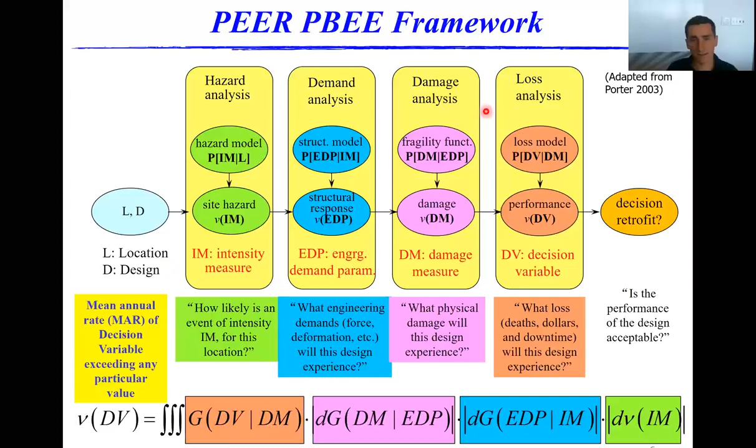So the framework essentially works by one-step memory, where, for example, the seismic hazard here depends on the location and the design. The structural response hazard depends solely on the intensity measure from the previous step, etc., through damage analysis and through loss analysis. So the focus of my presentation is going to be particularly on the seismic hazard analysis and the demand hazard analysis.

So here is a simple three-dimensional structural model that I've used as a benchmark for the purpose of illustrating how uncertainty quantification can be applied to time history analyses. So it's a 2x1 bay steel frame, which was designed using the design code for Seattle.

All members are wide flange shapes. The beams are made of A36 steel and the columns are made of A992 steel. The fundamental vibration period is 1.52 seconds, and we will be subjecting this model to bidirectional ground motion records.

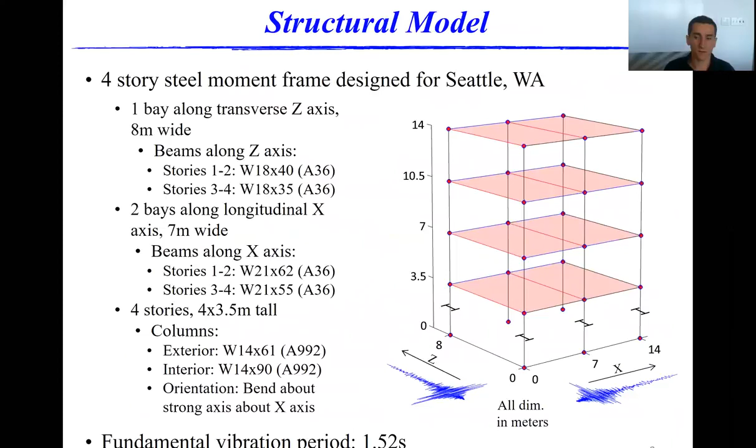So all members in my structure are modeled using one element. It's a nonlinear fiber discretized force-based beam column element. It uses 7 Gauss-Lobatto integration points, and they also employ the P-delta nonlinear geometric transformation and a linear elastic section aggregator for shear and torsional behavior.

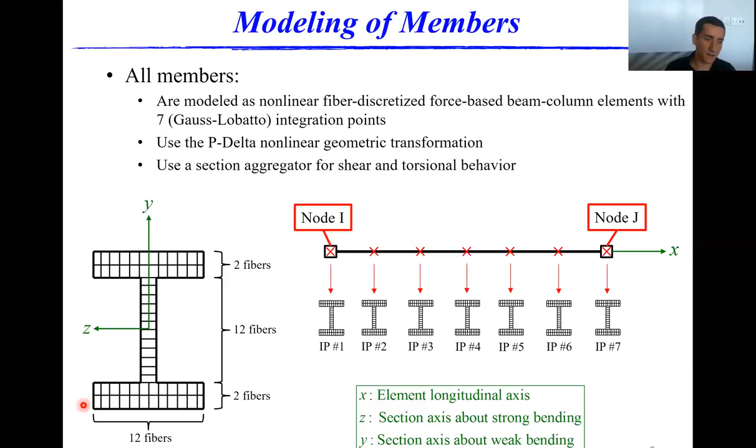And you can also see the fiber discretization right here. So we have 24 fibers in the bottom and top flanges and 12 fibers within the web. The fibers employ the Menegotto-Pinto uniaxial stress-strain relationship, which accounts for strain hardening once the steel is yielded.

The material parameters illustrated here, for example, Young's modulus, the yield strength, and the hardening ratio are going to be modeled as random variables. We're going to do this both for A36 and for A992. And so let's look at how they can be modeled with uncertainty.

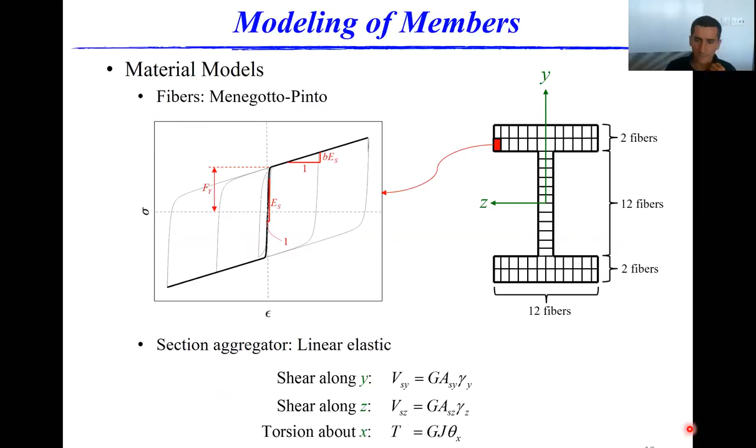Parameters subject to uncertainty are modeled as random variables. A random variable is a variable that can take any number of possible values. A realization of a random variable is a specific value that that random variable takes. So for example, if we're considering the elastic modulus of steel to be a random variable, then a realization might be 29,200 ksi. And since some realizations are more likely than others, a likelihood distribution must be identified.

Two of the most common ones are the uniform or equally probable distribution, or the normal bell-shaped distribution. These uniform and normal distributions are examples of probability density functions, or PDFs. PDFs are characterized by their distribution parameters, for example, the mean or the standard deviation here.

The area underneath the distribution within a set interval describes the probability of being within that interval. So for example, the probability of being within 1 standard deviation of the mean is about 68% for a normal distribution. And since the PDF must define all possible outcomes or realizations, the total area underneath it must be equal to 100%.

And finally, a common way to convey the dispersion of these distributions is to normalize the standard deviation by the mean. This is known as the coefficient of variation, and it provides a more intuitive measure of the uncertainty or variability as a percentage of the expected or mean value.

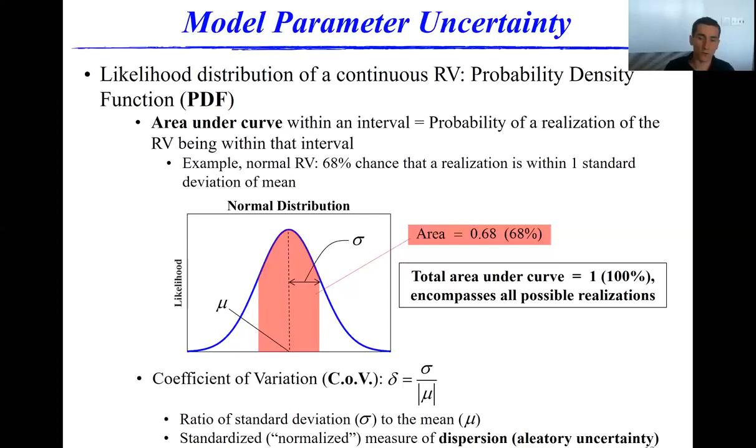So for my structure, to reiterate, I model Young's modulus, the yield strength, and the strain hardening ratio separately for A992 and A36 as normal and lognormal variables. You can see their means and the coefficients of variation. The yield strengths, I took the expected values, not the nominal values.

And we also chose to model the equivalent viscous damping ratio of the structure as a random variable. We employ Rayleigh damping, so it uses the 2 fundamental translational modes, and we have a mean value of about 2%, coefficient of variation around 20%.

I just want to key you guys in real quick: some of these variables have higher coefficients of variation than others. Young's modulus is around 3%, it's pretty low. Yield strength between 5 and 10%. So really the variables with high variation are the strain hardening ratios and the damping ratio.

And also we can define correlations if we have statistically dependent data. For steel, this is not a concern, but for concrete, you might have, for example, Young's modulus and compressive strength that are very positively correlated. So that has to be defined as well.

And now, even though we have clearly defined all the random variables, this alone is not sufficient for an OpenSees analysis. As we know, OpenSees requires specific numerical values in order to run. It doesn't have any understanding of distributions or means or anything like this. So what we have to do is we have to give it actual numbers to work with.

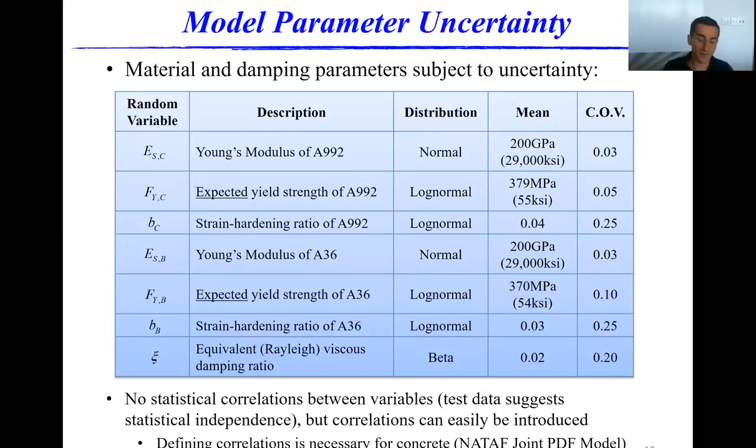So to do this, we're going to employ Monte Carlo simulation and use a technique called sampling, where random number generators via the computer draw realizations from a target probability density function. These will be drawn such that OpenSees has actual numbers to work with, and if we were to plot a histogram of all of the input realizations, say we took 1,000 of them, the histogram would approximately look like the target PDF.

So we're accounting for the variability, but we're also bringing in actual physical numbers that OpenSees can use. So the way the process works is you generate realizations of the random variable. This is just going to be a case where we have a single input and output random variable just to make it a little bit simpler for the time being. So we're going to generate realizations of the single input random variable, import it into the analysis software, run the analysis, and get some output realization.

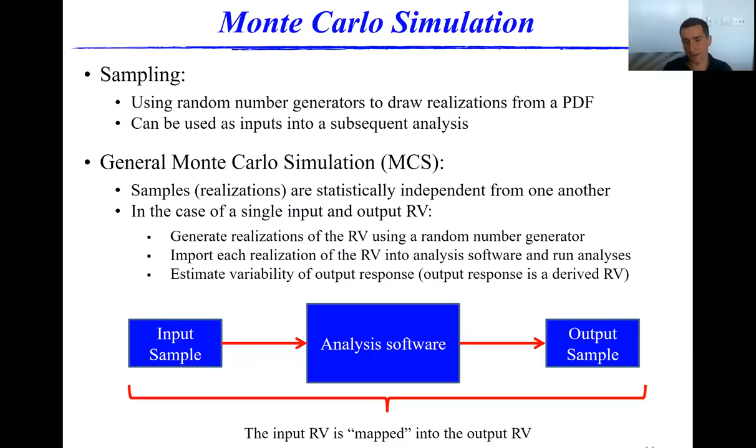This output realization is going to be a derived random variable, and when we run many realizations through our analysis software, we're going to have variability on that output response, and that's what we're looking to measure here today. In the case of multiple input and output random variables, it's easiest to consider the multiple random variables as a single input random vector and multiple output random variables as a single output vector.

So this is an example of a random vector. Each index is simply the random variables themselves. So you essentially put the random variables in the indices, and the ith realization of this input random variable completely defines the ith realization of my structural model, because these are the only parameters that change from one model to the next. So this is all that has to be defined for a new structure to be generated.

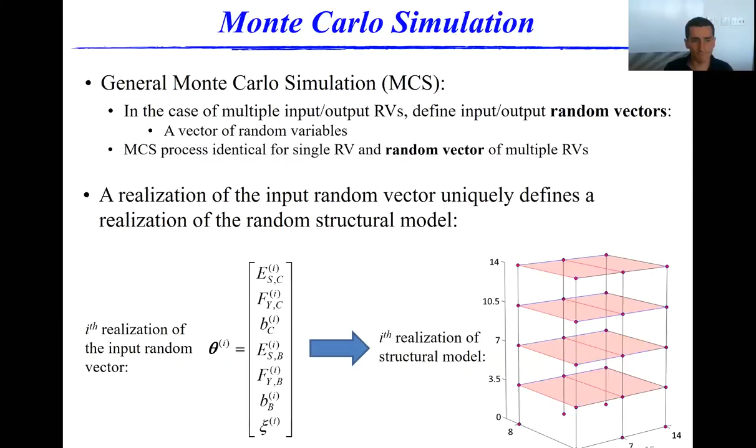And Monte Carlo simulation in general, it's completely numerical, and it has no real limitations. It could take any class of random variables, discrete or continuous, and there really doesn't seem to be any limit to how it can be applied. It's very robust as well, meaning that it asymptotically converges to whatever you're trying to estimate as you increase the number of samples. So the only real disadvantage with it is that it's highly computationally expensive and prohibitive, especially for a structure that has many degrees of freedom or many fibers.

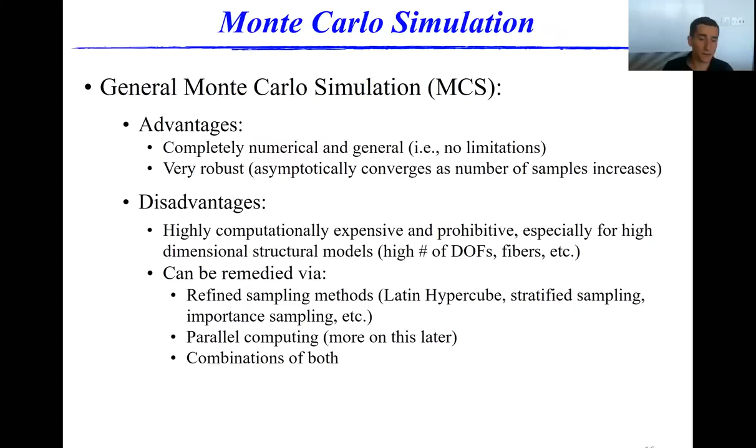But this high computational expense can be remedied either by employing a more refined sampling method, such that you can get the same degree of accuracy with fewer samples total, or by parallel computing, so you can run your samples simultaneously, or combinations of both. And I'll return to that at the end of the presentation.

So now I'm going to discuss how the uncertainty in the seismic loading is accounted for. So the main goal when selecting design ground motion records is to consider an entire range of seismic hazard levels. Each hazard level is quantified by an intensity measure, the most common of which for our field is spectral acceleration. And the value of the spectral acceleration is either calibrated by design codes, by ASCE, or some sort of supplementary seismic hazard analysis. I will focus more on the latter, specifically probabilistic seismic hazard analysis, or PSHA, and we're going to construct what's called the uniform hazard spectrum from that.

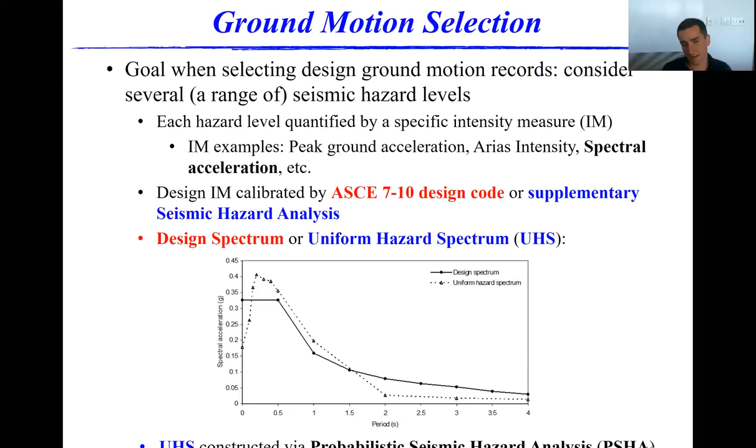So PSHA quantifies the annual rate of exceedance of the spectral acceleration by accounting for all possible sources of seismic activity and their associated rates of occurrence. For each source, all magnitude and site to source distances, those scenarios are accounted for, as well as the aleatory uncertainty of the spectral acceleration given these sources and scenarios. And the annual rate of exceedance is found by scaling and summing the contributions of all of them, essentially.

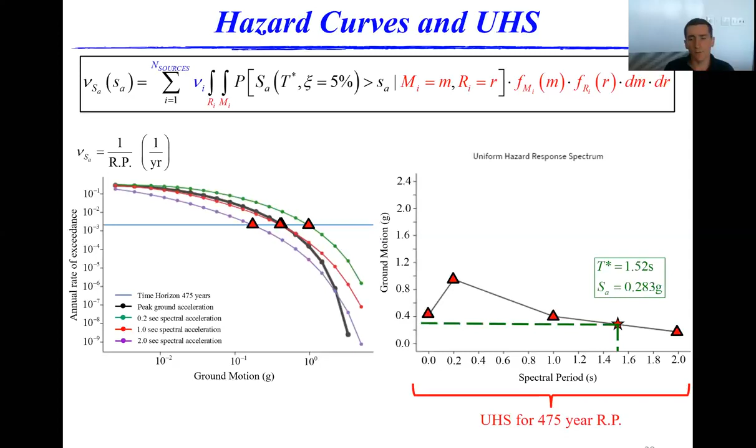And so at 0 seconds, which is the peak ground acceleration, we intersect here, which corresponds to this point. And we can do it again for the 0.2 second spectral acceleration, the 1 second, and the 2 second. And this is the UHS for a 475-year return period. So then we can just enter with our structure's natural period of 1.52 seconds, and we get a target spectral acceleration of around 0.28 g.

So the UHS on its own isn't really that helpful when you're trying to select specific ground motion records. This is because the UHS is an envelope spectrum. It's equally hazardous at all periods, and as we know, earthquakes are generally peaked at a few locations, but not everywhere. So what we're going to use is something called a conditional mean spectrum to have a more physically representative spectrum that we can then least squares fit ground motion records to, such that we can adequately get the natural variability, but also the expected average response for our structure.

So to construct the CMS, we first have to do a deaggregation of the seismic hazard. This essentially just finds what percentage of this total was contributed by each magnitude and distance pair, and we bin them such that we can find controlling pairs or average pairs that impact our structure. So this scenario is then used to create a preliminary spectrum that we will subsequently scale to create the CMS.

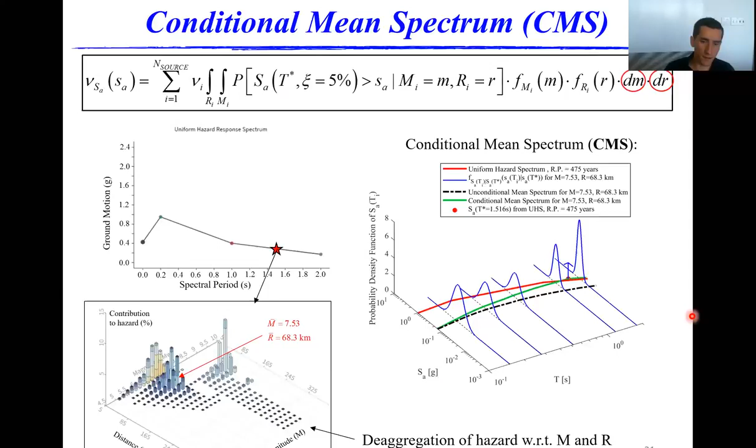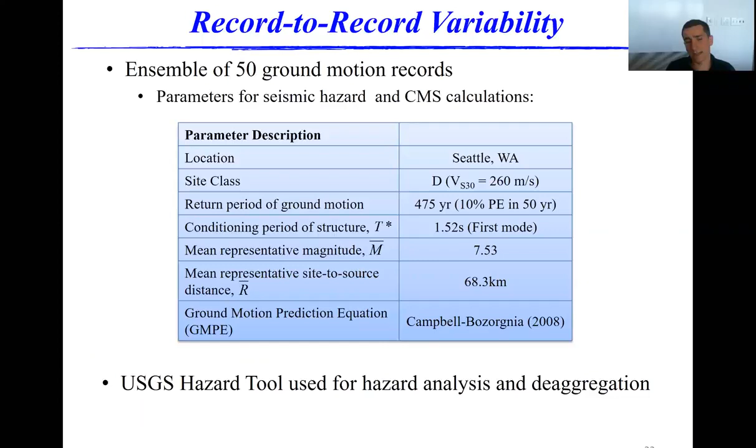So the inputs required to perform a PSHA and construct the resulting CMS curve are given here. You have to define your location, your VS30 site class, return period, and these are just the minimum requirements. The more you know, the better. If you know exactly some causative faults and exactly their distances away, that's even better. But at a minimum, you need to have these values in order to do a CMS. So you need the mean representative M, the conditioning period, the mean R. You have to pick a ground motion prediction equation or several ground motion prediction equations. And for my analysis, I use the USGS hazard tool, both for the hazard analysis and for the deaggregation.

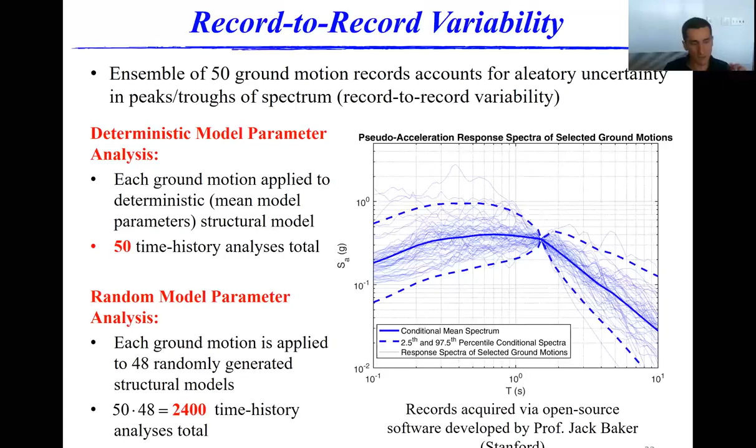So for a deterministic model parameter analysis, each ground motion is applied to the same deterministic structure, where the deterministic structure is created by using just the mean model parameters. So that's going to result in 50 time history analyses total, because there's 50 ground motion records. For a random model parameter analysis, we want to subject each ground motion to a variety of realizations of the random structural model. I selected 48 random structural models per ground motion, and that results in 2,400 different time history analyses, with 2,400 different realizations of the random structure. I'm not using the same 48 on all 50 ground motions.

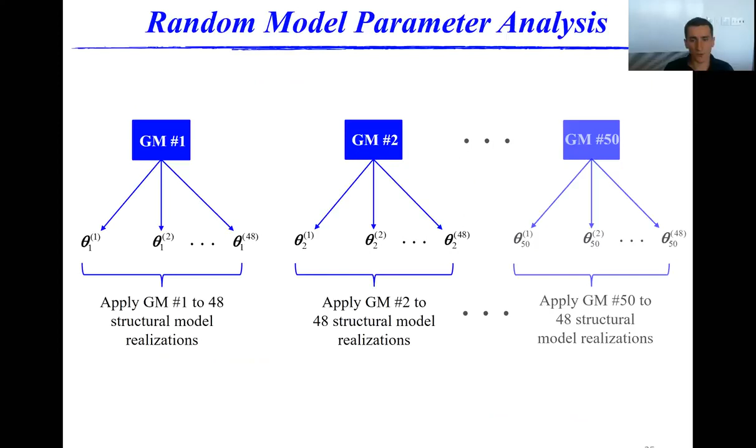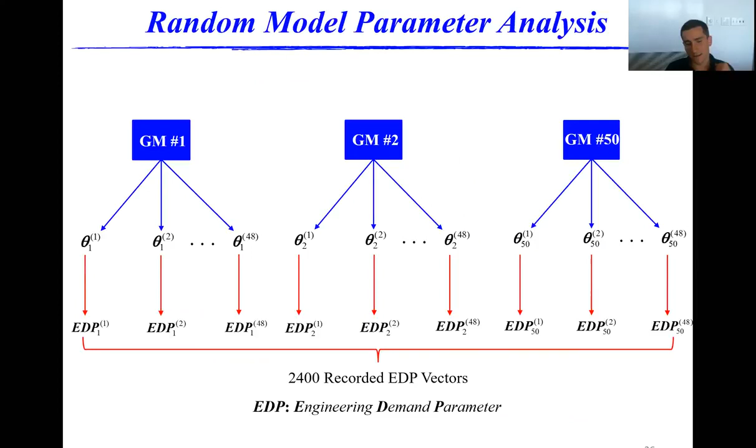And I included this slide just to illustrate my workflow. So recall that a realization of the model is completely defined by the input random vector. So what I do is for ground motion 1, I generate 48 structures. The subscript denotes the ground motion number, the superscript denotes the structure number, and I do the same thing with ground motion 2 and all the way through ground motion 50. This results in the 2,400 time history analyses, and these will then result in 2,400 recorded EDP random vectors. EDP is engineering demand parameter. So now that we've covered model parameter uncertainty and record-to-record variability, we can compare the results from the deterministic and the random parameter analyses.

So the EDPs that I will be focusing on are the peak absolute floor acceleration envelope over each floor, as well as the maximum peak floor acceleration over all floors. So for brevity, I will refer to this complete overall maximum as just the peak floor acceleration, or PFA, and I'll use the word envelope whenever we're looking at individual stories.

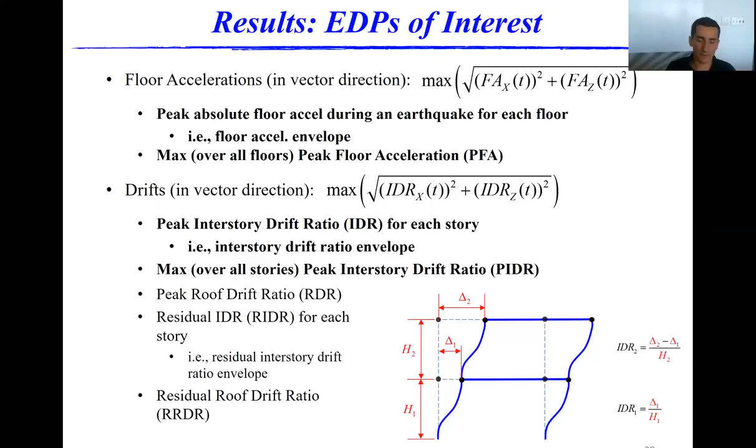Likewise, I'll also be looking at the interstory drift ratio envelope and the maximum interstory drift ratio over all stories, which I will call the peak interstory drift ratio, or PIDR. And all of these EDPs were measured in both the transverse and longitudinal directions. So for each time step, I took the magnitude of the vector that they formed in the XZ plane, and I took a maximum over the whole time history. So these are vector drifts and vector floor accelerations.

So here I've plotted 6 representative ground motion specific PFA envelopes of the 50 total. So for example, ground motion 3 is subjected to 48 structures. So the 48 different envelopes that were a result of those 48 analyses are pictured here in blue. The mean of those 48 is this black line here, and the red one is the result from the deterministic model case where the mean model parameters were used. And we can see that they align well, which corresponds with the assumption of a first order approximation.

And we also can note that for some of these ground motion records, the model parameter uncertainty seems to play a relatively small role, particularly for, say, ground motion 24 or ground motion 8. We're not seeing a whole lot of variability on the EDPs just from model parameter uncertainty. But for other ground motion records, say, for example, ground motion record 31, we see a lot of variability on the second floor's peak floor acceleration. So this could indicate that in some instances, model parameter uncertainty can have a tremendous effect, and other times it has a negligible effect.

And the purpose of looking at the plots like this is that you are isolating the effects of model parameter uncertainty. So you're cutting out record-to-record variability for each of these plots. This is just the uncertainty due to the model parameter uncertainty.

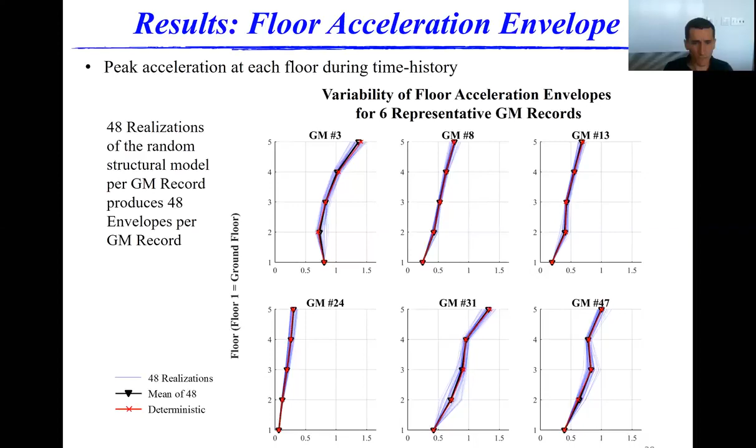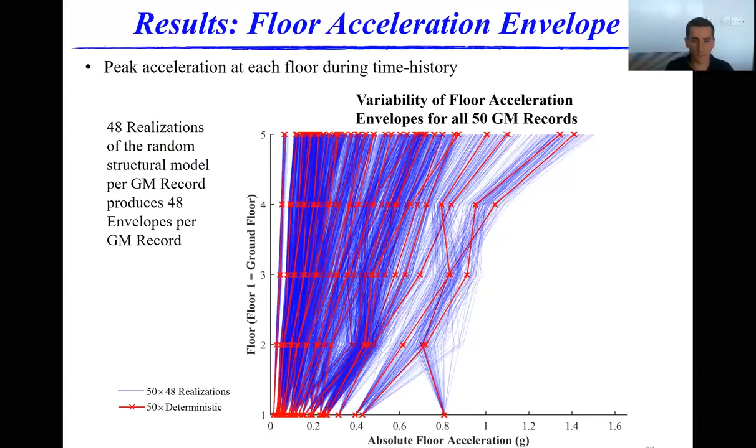And we can also look at all 2,400 envelopes at once and compare them to the 50 deterministic envelopes. And what we can see from here is that the scatter is relatively similar between the two. There are many more blue curves than the red curves, but they still cover the same broad range of accelerations along every story. So since they span such a broad range, several of the statistics that I measured for these EDPs are relatively identical between the deterministic and the random structural model.

For example, the mean over all 2,400 random cases and the mean over 50 deterministic cases gets roughly the same number on each floor. Likewise, the coefficient of variation does not change much between the deterministic and the random structural model. One thing I do want to note here, it's a bit counterintuitive that the random structural model actually estimates a lower coefficient of variation than the deterministic case. This is counterintuitive because we're introducing more uncertainty, not less.

So you'd expect more uncertainty on the output, but we believe that this might be due to small sample estimation uncertainty with respect to the number of ground motion records that were selected, particularly for the deterministic case. A greater number of ground motion records could very well push the results in the other direction. And also remember that even though these results are very identical to one another, any given ground motion record can still have a lot of sensitivity to the model parameter uncertainty on some floors or some stories.

And I also show the maximum over all 2,400 and maximum over all 50 deterministic runs. And we see that the maximum is higher for all of the random cases as we expected, the absolute maximum, which corresponds out here. So these versus this red one right here.

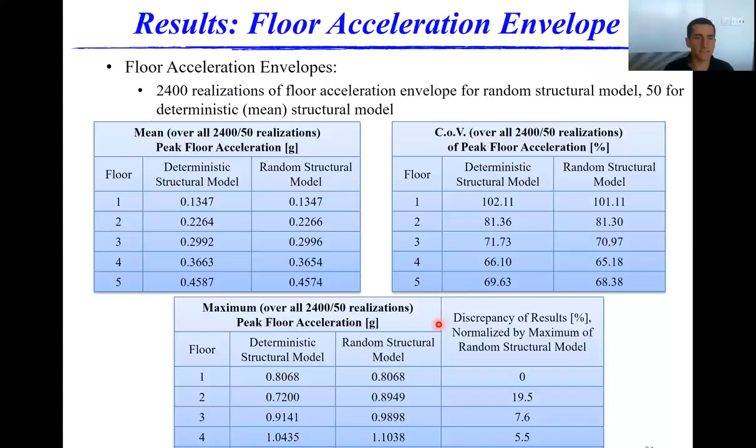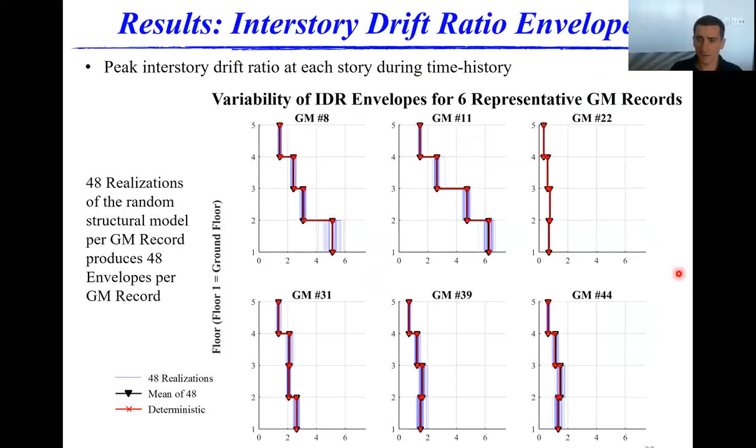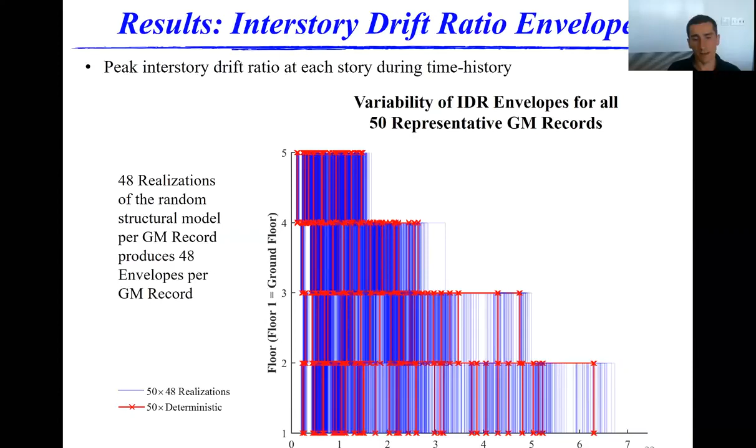I did the same thing with the peak interstory drift ratio. At each story, I selected 6 representative ground motion records, a few that have almost no sensitivity to model parameter uncertainty, others where on one floor you see a range from 4 to 6%, so that's not negligible by anyone's standards. And so now we can also look at all 2,400 realizations of the interstory drift ratio envelopes compared to the 50 deterministic envelopes. And again, we see that they cover the same scatter. The absolute maximum for the random cases is again going to be larger on each story as expected, but the means and the coefficients of variation are going to be very similar once again.

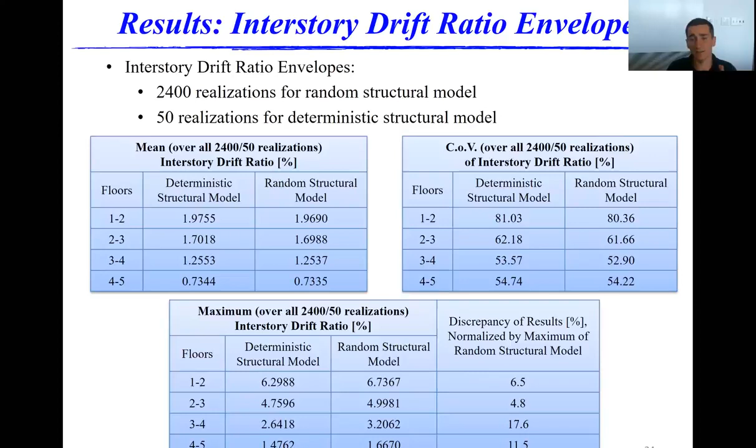So now, oh, sorry, I went too far. So going beyond acceleration and drift envelopes, we may be more concerned with the probability of exceeding a particular acceleration or drift, and by extension, the effect of model parameter uncertainty on these probabilities.

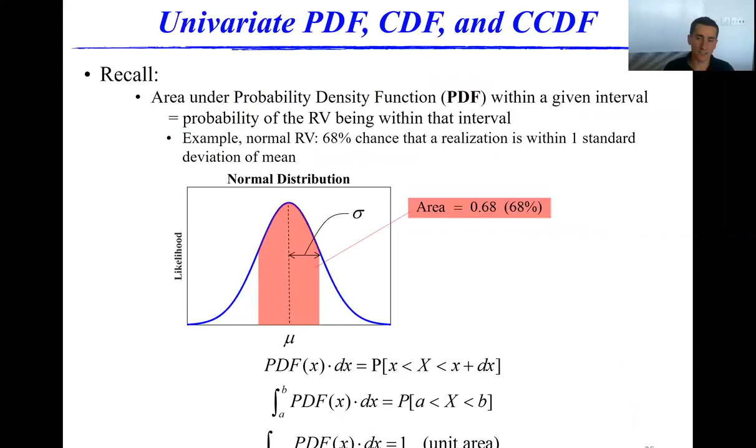So to illustrate these probabilities of exceedance, I need to add to some of the probabilistic theory I previously covered. Recall that the area under a PDF corresponds to a probability of being within that set range. So since we're generally more concerned with being above or below a threshold rather than within an interval, it's convenient to introduce something called a cumulative distribution function, or the CDF. The CDF is simply the integral of the PDF from the leftmost limit to some undisclosed upper limit. And the CDF value at the leftmost end is 0, and it's 1 at the uppermost end.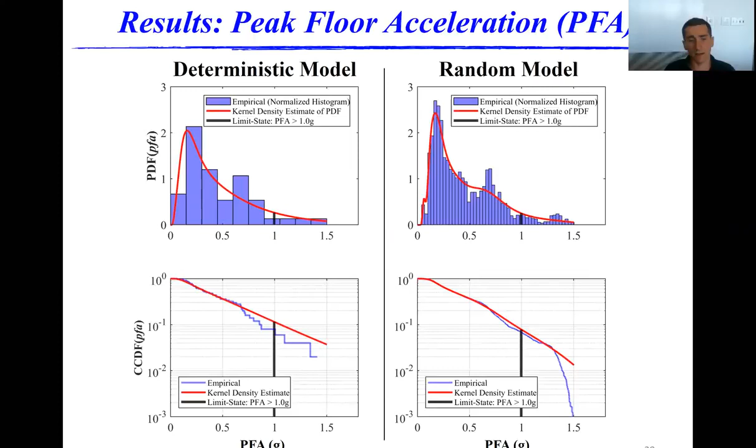So now a normalized histogram can be fitted using kernel density estimation, and this is an approximate continuous PDF of those results. And then we can define our limit state, which for me, I chose to be 1G on any floor, and we're concerned with being greater than this value. So in the deterministic and in the random case, we can either choose to fill in this area up here under the curve, or we can read off the complementary CDF function values at the corresponding x coordinate, which is 1G. And we can do this for both the deterministic and the random model.

And we see that the deterministic model actually estimates a higher % chance of exceedance than the random model, which again might be due to small estimation uncertainty. A good way to think of the small estimation uncertainty is to look at this value here of 8%. 8% of 50 realizations is only 4 realizations. So if we happen to have a 5th one in here or one less in here, so 5 or 3, this result could have been 10% or 6%. It's very sensitive to just 1 or 2 data points. So it's not that good of an estimate.

This one is a bit finer. As you can see, it has a few more digits to it. And also the kernel and the histogram are more in agreement here because there's more data. Here there's a greater discrepancy between the two, and that's again due to the small sample estimation uncertainty.

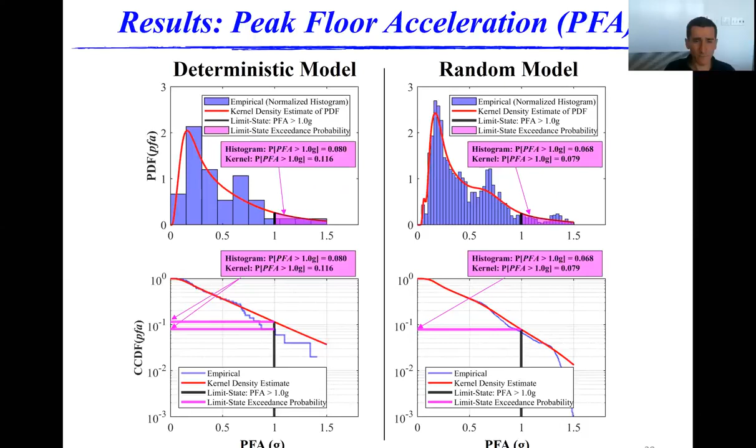I did the same thing with the peak interstory drift ratios. I selected a limit state of 3% on any story, and again, we can flesh out that area on the upper tail, or we can read off the complementary CDF values. And here we see that the values are in much greater agreement. This is likely due to this not being as high of a fractile as on the previous plot.

Now we're dealing in the 26% range. We have more data points that are above this 3% drift. We have actually 13 in the deterministic case. So 13 is a better number than 4 because it's less sensitive to a small increment up or down. And again, we have very good agreement on the random model results.

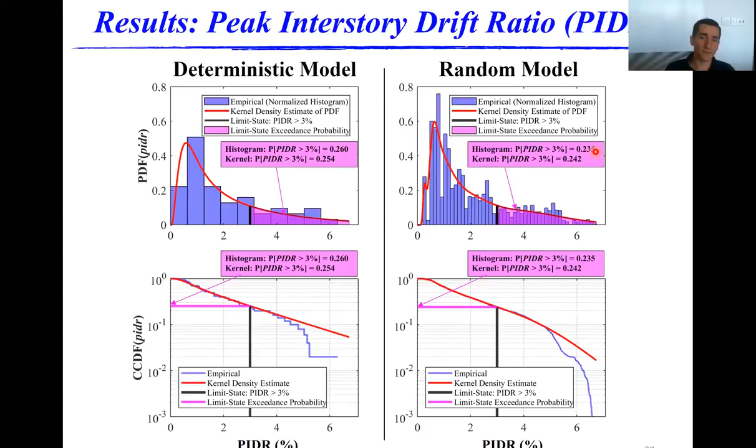Now we are also probably more interested in the joint probability of either exceedance, not necessarily one at a time. Looking at one at a time is kind of limiting because as designers, we want to ensure that all of our bases are covered. So in order to look at more than one EDP at once, I have to, again, add a little bit to the probabilistic theory that we have been talking about. In particular, I have to define a joint PDF, a joint CDF, and a complementary joint CDF.

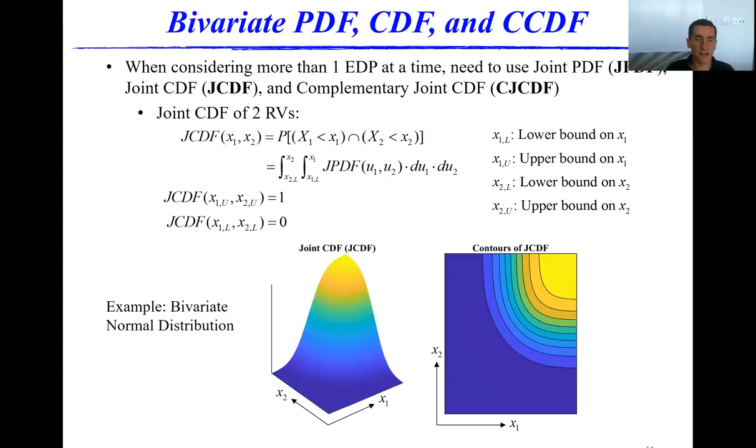Okay. And now, just like how in the univariate case we had a PDF with a CDF, now we have a joint CDF for our joint PDF, and now it's the joint probability of either value x1 or x2 being less than some threshold. So it's, again, the intersection between the 2. And finally, we can define the complementary joint CDF as 1 minus the joint CDF, which asks the probability of either variable exceeding its corresponding threshold.

So now notice that the cap is a cup. This means and/or. So asking the complement of the probability of neither EDP exceeding its threshold is asking the probability that either EDP, one or the other or both, exceeded their threshold. So it makes sense intuitively. You can graph it, or you can use something called De Morgan's rule to prove it. But either way, we're just looking at

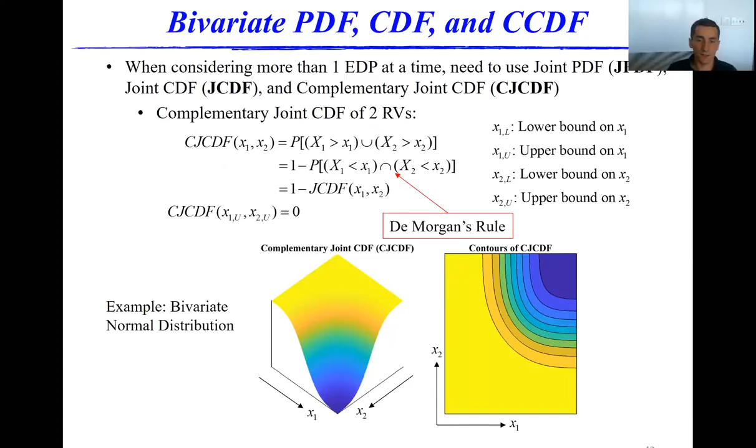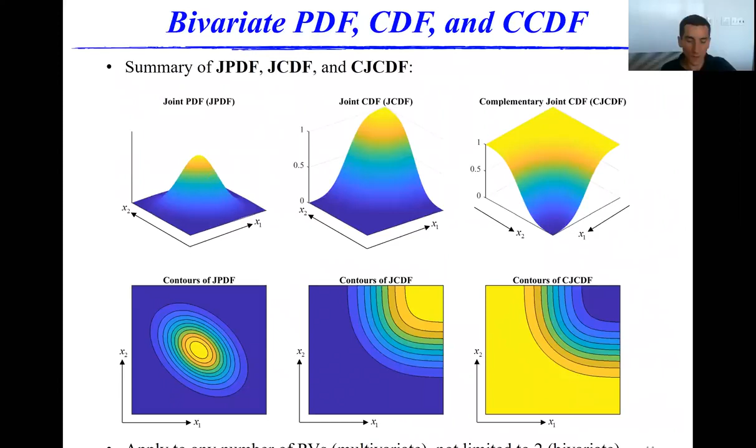And now, though I won't consider more than 2 variables at once in this presentation, I just want to note that these multivariate statistics are not limited to 2 variables. There's no upper limit to however many random variables you can look at once. The only thing is that you can't visualize them, so we don't have surfaces anymore. We're going to have hypersurfaces, and it just gets very mathematically cumbersome. So we're only going to stick with 2 EDPs here.

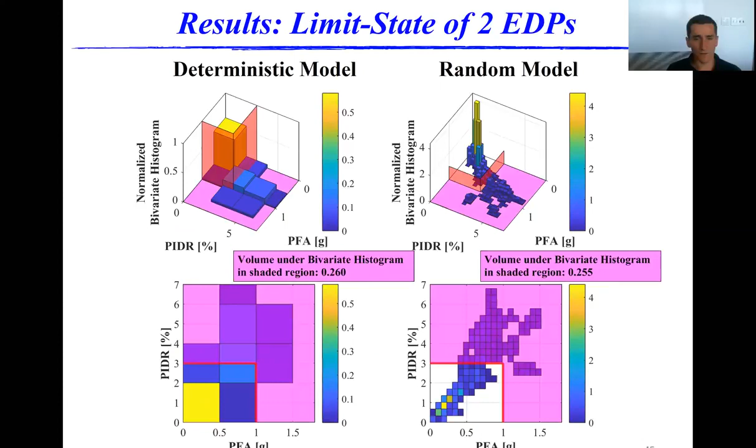And like we did for the univariate case, we can fit some joint PDFs by kernel density estimation to these histograms to get an idea of the dispersion. So what I want to quickly note is that for the random case, the kernel density estimate is 26.6% chance of exceedance versus 25.5%. On the flip side, in the deterministic case, the kernel is estimating 30.2% versus 26% from the histogram. So again, we're seeing a greater discrepancy in the deterministic case, which is due to the small sample estimation uncertainty.

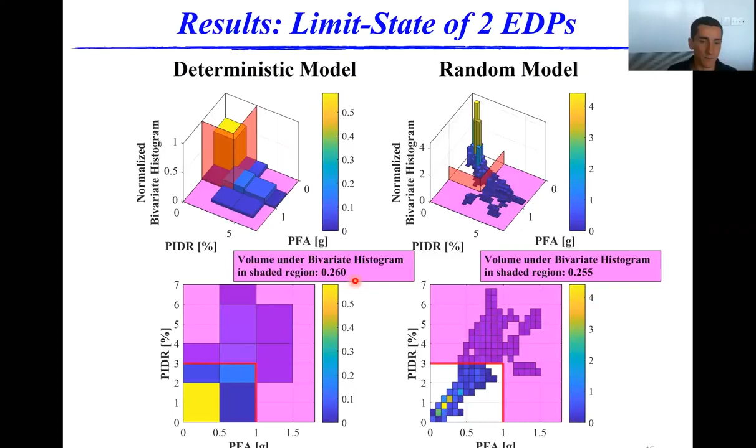Moving on from this joint PDF, again, integrating a region, especially one that is not just one region, but really like 2 or 3 here, can be very cumbersome, especially if we want to evaluate the percent chance of exceedance at multiple design points. So it's, again, useful to use the complementary joint CDF, where we can simply measure the surface function value at a specified location. And these are integrated from the kernel density estimates of the joint PDF, so the results are identical.

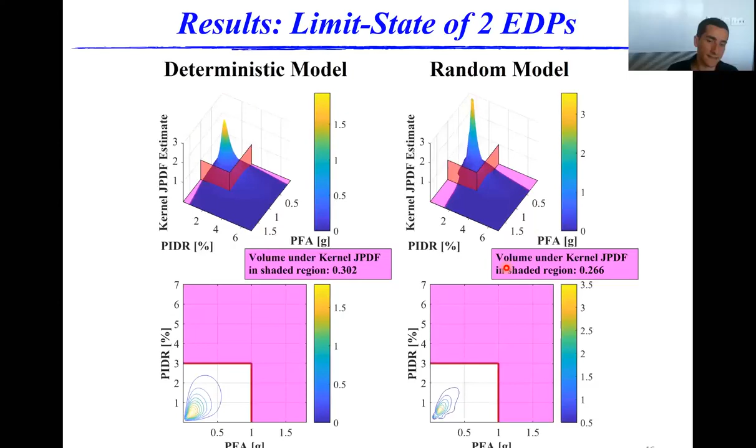So I just want to conclude on my results by saying that a general computational framework has been assembled that combines uncertainties of the model parameters and the loading. And by general, I mean that the framework works for any OpenSees model and any number and class of random variables. It also allows for EDPs to be quantified by statistical descriptors, and it's completely open source.

So the model doesn't necessarily have to be from OpenSees. For you wind engineering people, the loads don't have to be earthquake ground motion records either. And specifically for my research, overall, I found that the record-to-record variability dominates the aleatory uncertainty of the EDPs, and it kind of outweighs the contributions from the model parameter analysis when all the ground motion records are considered at once. But again, any individual ground motion record can still be sensitive to this model parameter uncertainty.

Part of the reason why we also think that the model parameter uncertainty was outweighed by the record-to-record variability was because those input random variables had lower coefficients of variation, as I previously alluded to. So we're looking to next apply this framework to a reinforced concrete structural model. Concrete obviously has a lot more natural variability because it's not as controlled of a structural material. So there's going to be higher coefficients of variation, and we're also going to have positive correlations between some key parameters, which will most likely increase the failure probability.

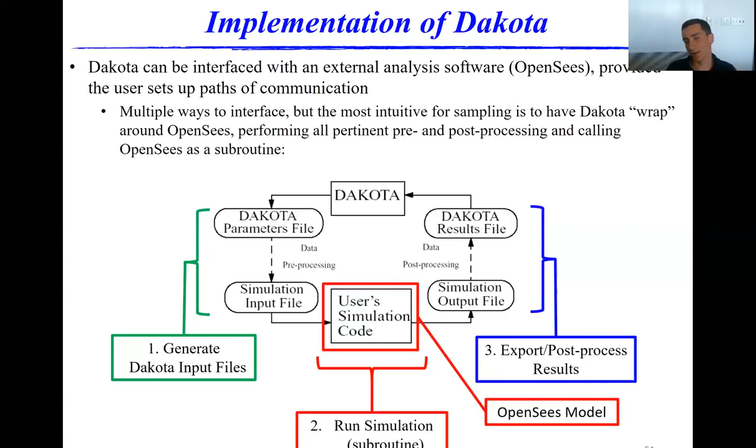It's going to generate those input files, and then it's going to call OpenSees as a subroutine. So it's wrapping around and it's just calling it in the background. And once it exits, then it's going to post-process and export those results back to Dakota. So it's essentially wrapped around OpenSees, and that's probably the easiest way to implement it.

The main Dakota input file is going to define what type of method we're doing. So for me, I'm doing sampling. I'm going to request 48 samples for any job submission. I'm going to give it a seed number so I can reproduce these results if I want to, and I'm going to use Latin hypercube sampling.

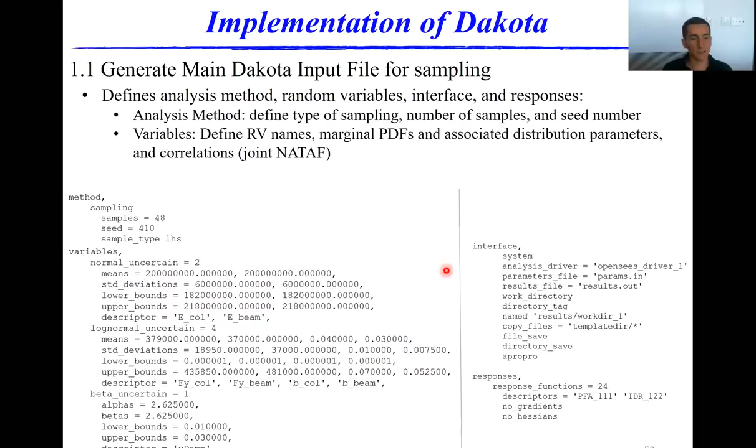You also have to define your random variables, in particular their names, which are case sensitive, and these have to be the same as what they're written in OpenSees in order for the two to communicate with one another. Variables is also where you define the distributions, the normal distribution or the lognormal distribution, means, standard deviations, upper and lower bounds if you don't want to consider values outside of a certain range, etc.

Now, you also have to define the interface section over here. The interface section is essentially where you're going to be setting up all the pathways of communication. You've got your analysis driver, which calls OpenSees. You're also going to be defining your work directory such that the results can be obtained automatically rather than you having to flip through 2,400 different results files. So this is just essentially allowing the two programs to communicate with one another more easily.

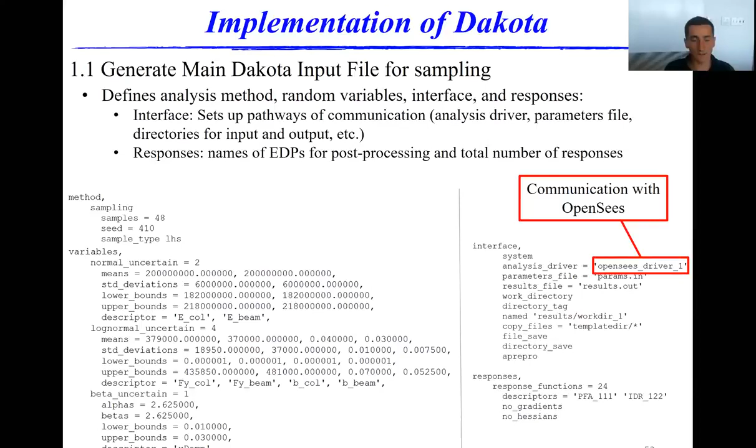And you finally have to define any responses that you want Dakota to do the post-processing on. So if I want the peak floor acceleration or the interstory drift ratio to have some statistics measured on them, I'm going to put these here. You can also optionally use another software like MATLAB to do the same stuff if you prefer.

And now the analysis driver pre-processes a template file such that it can be interpreted by OpenSees. So real quick, the template file, you can see it's written in the Tcl language: set your variable, then whatever the number is going to be. These curly braces just tell Dakota to substitute in the realization here. And so the first line in the analysis driver just pre-processes it into the Tcl file, and then the second line calls OpenSees via the command line and gives it the input file, the Tcl file that will source this param.tcl file within it.

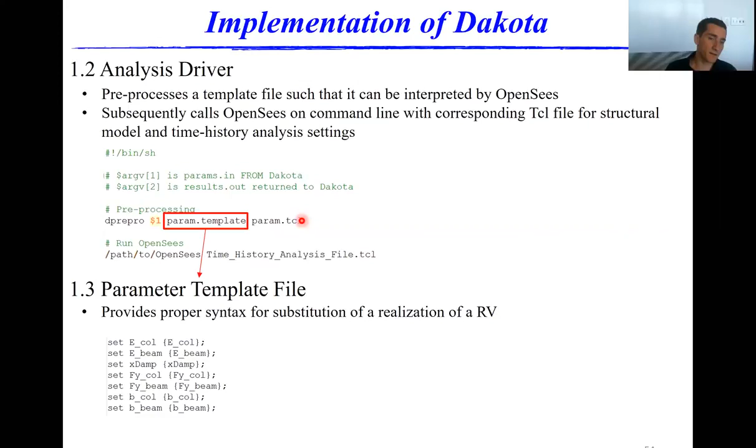Then all you have to do is run your simulation. So you just call Dakota on the command line, you tell it the input file, dakota.in, and the output file to store the results. Dakota will pre-process for a few seconds, and then it'll run OpenSees in the background. It'll wait for the exit flag from OpenSees, and when all the simulations are done, it'll search the current work directory for the EDPs themselves. It can then perform any statistics that you want on it: empirical PDFs or CDFs, moments, confidence intervals.

There will also be an output file which essentially summarizes the entire analysis: how much wall clock was used, how many CPU hours, the assignment of jobs to cores in the case of parallel computing, what were all the realizations of the random vectors, etc. And it'll also provide a restart file in the likely case that some of your OpenSees analyses crash.

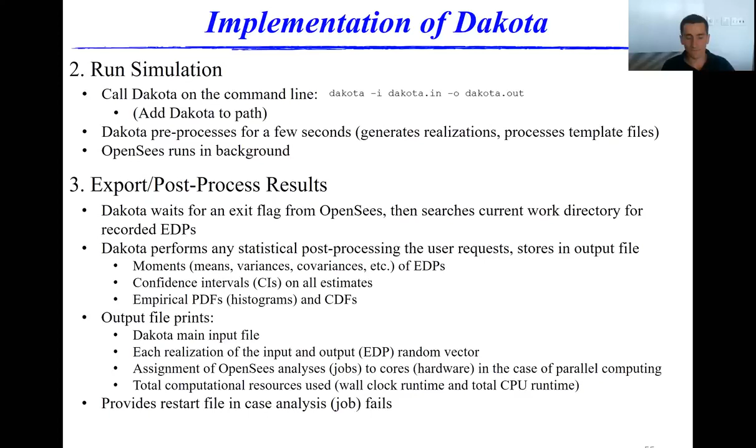And so to conclude, I will now end on parallel computing. As previously stated, the problem with Monte Carlo simulation is that it is computationally inefficient, particularly when you have a high number of sample evaluations where each one is time intensive and run sequentially. For my simple structure, the average runtime was about 2.8 minutes, but if you multiply that by 2,400 analyses, that equates to almost 5 days where you're waiting on your results.

And obviously, in the grand scheme of things, 5 days for people in our field is not a whole lot of time to wait. But if your structure is a large structure and the runtime is maybe a day, then that would take years to conclude such an analysis, and that's completely unacceptable. So since each analysis is independent from one another, you can minimize your total runtime by maximizing the number of cores that you have access to.

So optimally, I would have one core for each analysis, and in such a situation, the total runtime would be the duration of the longest analysis, which for me was around 10 minutes. The gains from parallel computing are very obvious just from that. So you can wait 1 day for your 2,400 analyses of your really large scale structure by running them all in parallel, essentially. And the only way to access these resources is by cloud computing, supercomputing, or cluster computing.

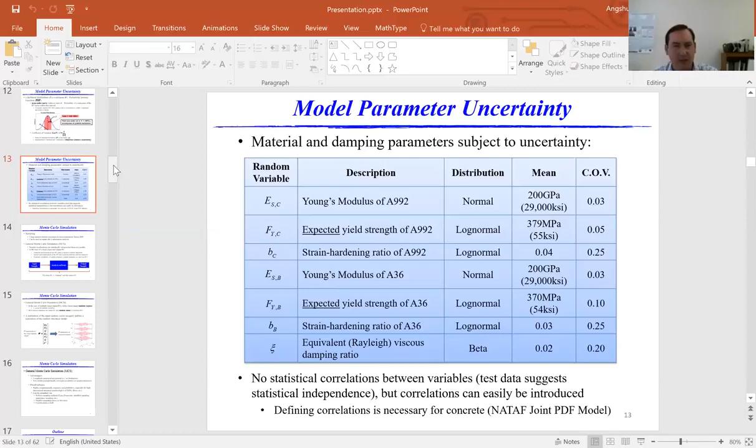How are the mathematical models like Monte Carlo integrated into the simulation? Were they built into Dakota, or are they coded separately? Well, Monte Carlo simulation is not really something that has to be necessarily implemented. All you really need is a random number generator that can draw realizations from your target distribution. And then those numbers just have to be able to be put into your analysis.

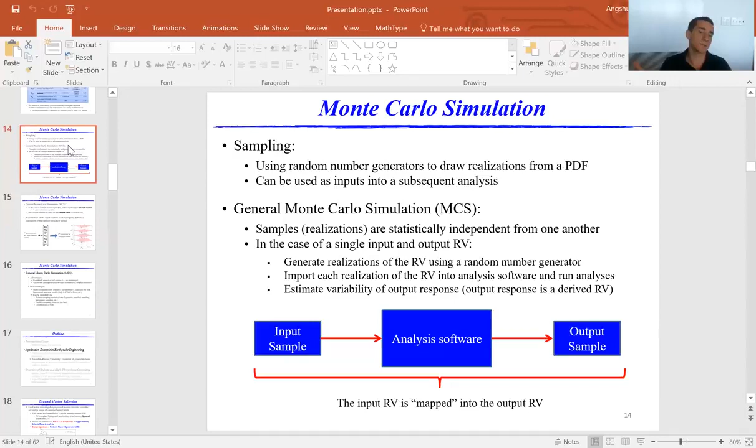So Dakota implements sampling to get this done, but Monte Carlo simulation shouldn't be looked at as some grand thing that has to be set up and orchestrated in such a way for it to run. There's as little user interaction as possible. It's the most general case, in the sense that we don't have to define that many things in order for it to run. So Dakota just generates the samples, calls OpenSees, puts a sample into OpenSees, waits for OpenSees to finish, and then just reads the results. So that's pretty much it.

Okay. Have you considered high intensity or near fault ground motions which produce interstory drift ratios more than 3 or 4%? And a comment along with that question is that the running time for a single nonlinear analysis of 2.8 minutes seems relatively fast for a 4-story 3D building. So if you have any comments on that?

Yeah, so since each member is only modeled with one element because they're force-based, there's actually not that many total fibers in any given iteration of the structural state at a certain time step. There are only around 150 degrees of freedom, if I remember correctly. I think a total of around 350 sections where there's Gauss-Lobatto integration points.

So the actual level of complexity, even though it's a 3-dimensional structure with several bays and several stories, it has very, very few nodes and degrees of freedom, such that my analyses can be run quickly. Because again, it's just a benchmark structure.

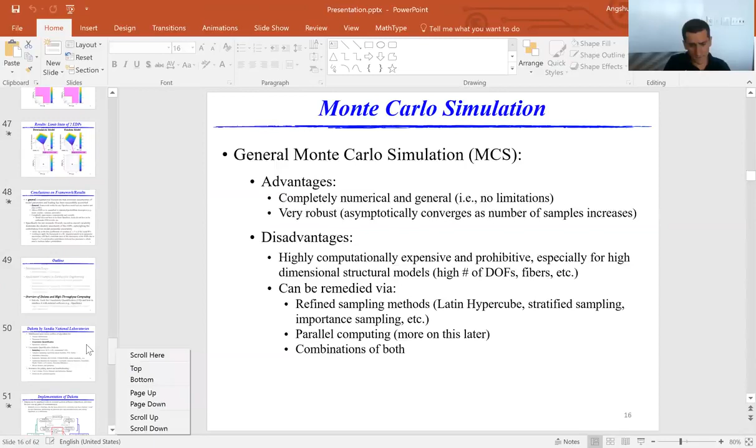Do you think it's possible to use Dakota to perform Bayesian updating to optimize a model using data recorded from sensors? Yeah, it can do that. Like I said, it has the epistemic uncertainty options, and that's really what Bayesian updating is about. It's about updating models such that we have lower epistemic uncertainty. And they have a few options for that. I know I've read Bayesian inference. I've seen they have something called Dempster-Shafer theory of evidence, which I'm not familiar with.

But you can also do interval analysis to bound your results. They definitely do have Bayesian capabilities, though. I haven't explored it for that. Like I said, I've been focusing more on aleatory uncertainty, but I've definitely seen the word Bayesian all over the user manual. So I'm fairly confident that you can use it for that.

Okay. How did you conclude that the engineering demand parameter is more affected by aleatory uncertainties than epistemic ones? It's not necessarily that we concluded that it's more sensitive to that. It's that we were more interested in modeling the inherent variability of the structural parameters. I'm not trying to say that they're so uncontrollable, like we have no clue how strong this building is. I'm just saying that we were more interested in seeing how much of an effect the true inherent randomness has, that we usually model as deterministic features or values in our models.

We were curious to see if we were to actually treat it the way it more physically should be treated, if that would have an effect. The epistemic uncertainty would come more in the form of, was this a good distribution to pick for this random variable?

Or is this an adequate mean? Or is this an adequate coefficient of variation or a correlation between two variables? But I don't want to consider aleatory and epistemic on the same level because they're really answering different questions. And our question was more geared towards trying to make our model a little bit more physically realistic, just to see the effects. So. Okay.

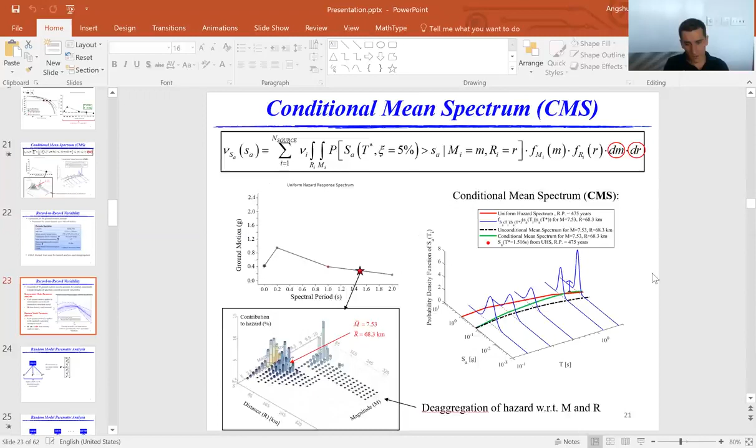And yeah, you do that over and over and over, and you end up getting ground motion records that actually scale well at the target period, but they're also getting that variability elsewhere. So it's actually Monte Carlo simulation built into it. And I didn't discuss that because I didn't want to take up too much time.

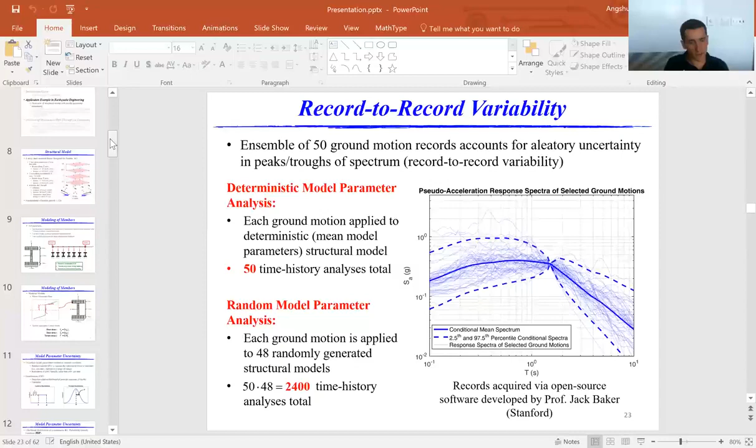Okay, one more question is, have you thought to do an inverse analysis to obtain these results? I'm not quite sure what the inverse analysis would be. If they're referring to the performance-based earthquake engineering methodology, if they're talking about the inverse idea where the structure has yet to be designed and we are trying to gauge its future demands or future damage or future loss, then the modeling of the aleatory uncertainty is definitely geared towards that, because we're modeling the Young's modulus or the yield strength as random variables.

Once your structure has been built, you can put in sensors to better measure those values, and that's where we get into the Bayesian updating. So by looking at it more from an aleatoric perspective than an epistemic perspective, we really are doing that inverse problem already, where we're looking at how uncontrollable randomness can impact our answer, and then we're trying to adjust for that. So I might have misinterpreted the question, but if that was the question, then I hope that was an adequate response.

Okay, and then there's some interest in your reinforced concrete study that you mentioned. Is that something that is in the works, or is there an opportunity to share that in the future? We can maybe do another webinar on the concrete model. I'm imagining there's going to be a little bit of work in terms of automating exactly which simulations we expect to crash, which ones were legitimate failures versus just spurious calculations. Also, the structure uses displacement-based elements.